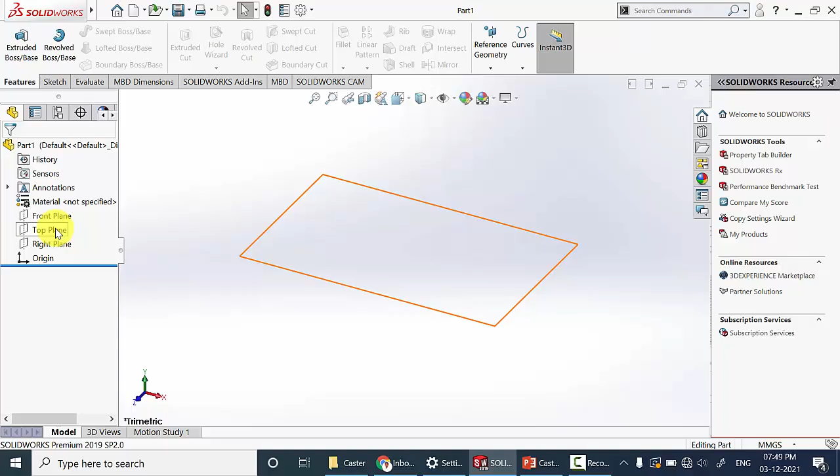Go to SOLIDWORKS, click new and create a new part. First I am going to draw the front view: select front plane, click sketch, and draw the outline of its front view.

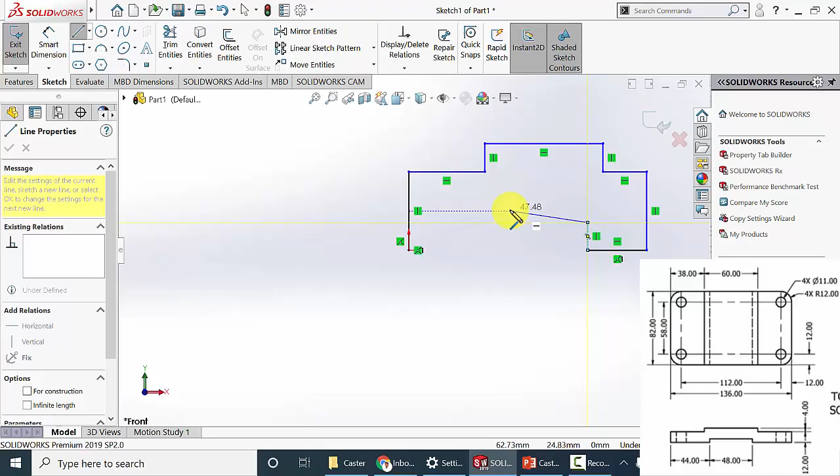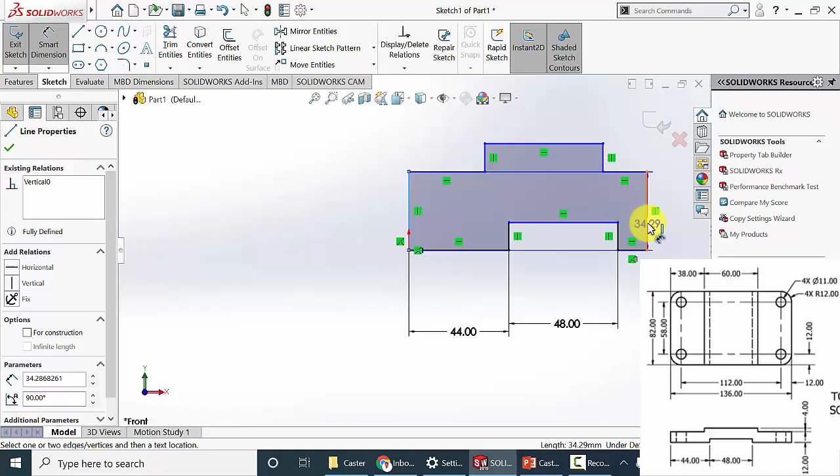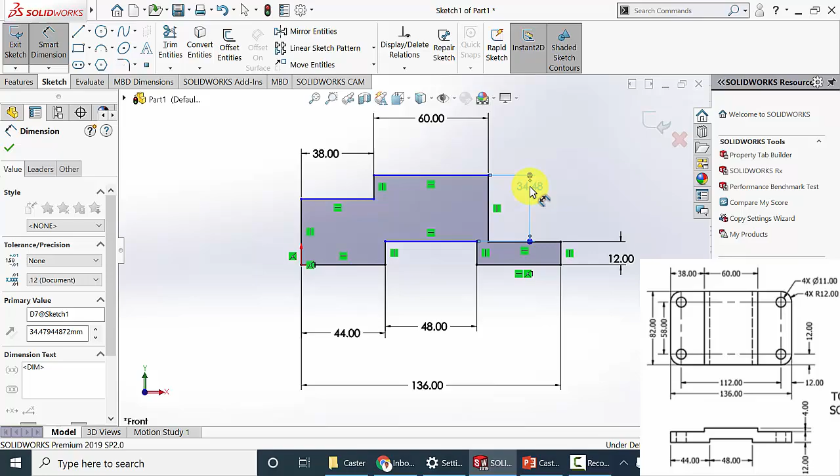The length of this region is 44 mm, then here it is 48. The overall length is 136. Then this length is 38 mm, then here the length is 60 mm. The height of this region is 12 mm, so here also it is 12. Then the height between these two surfaces is 4 mm.

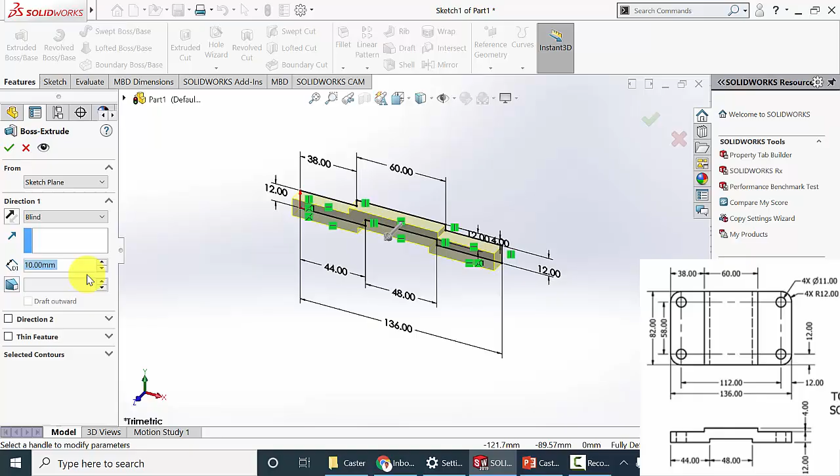Click OK. Go to Features, click Extruded Boss. The extrude distance is 82 mm.

Now to draw the holes, click the top plane, click Sketch and draw a circle here. The circle diameter is given as 12 mm, and the circle is located at a distance of 12 mm from each side of the plate.

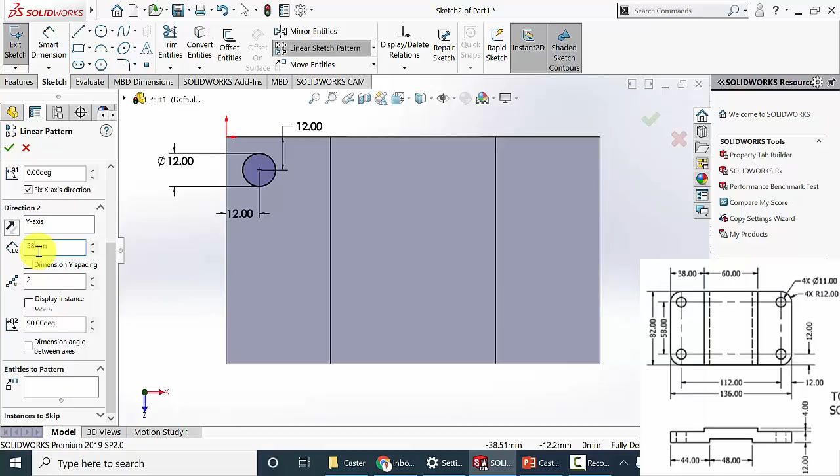Now I am going to create the linear pattern. Go to Linear Sketch Pattern. In the X direction, I am going to pattern it with a distance of 112 mm, and in the Y direction the number of patterns is 2 and the distance between the holes is 58 mm. Select the entities to pattern. The Y direction is upward, so change the direction, then click OK.

Now go to Features, click Extruded Cut, then click OK. Then I am going to create the fillet, click Fillet, and the fillet radius is given as 12 mm. Select the 4 corners.

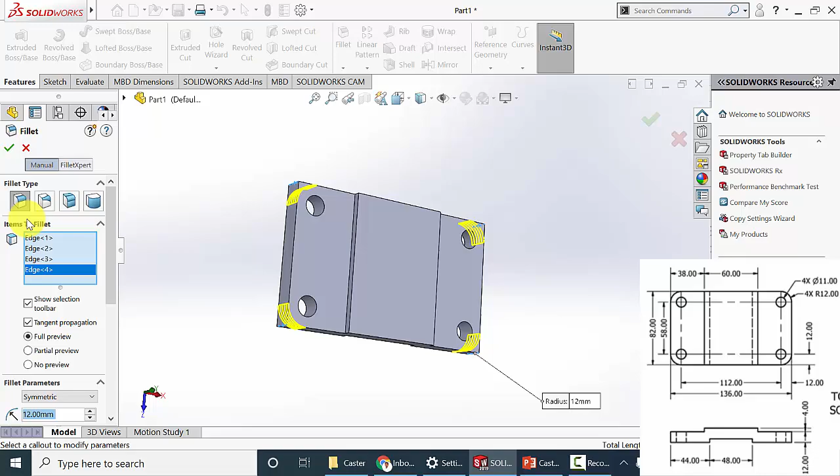Now you can save this. Next I am going to draw the wheel. Create a new part.

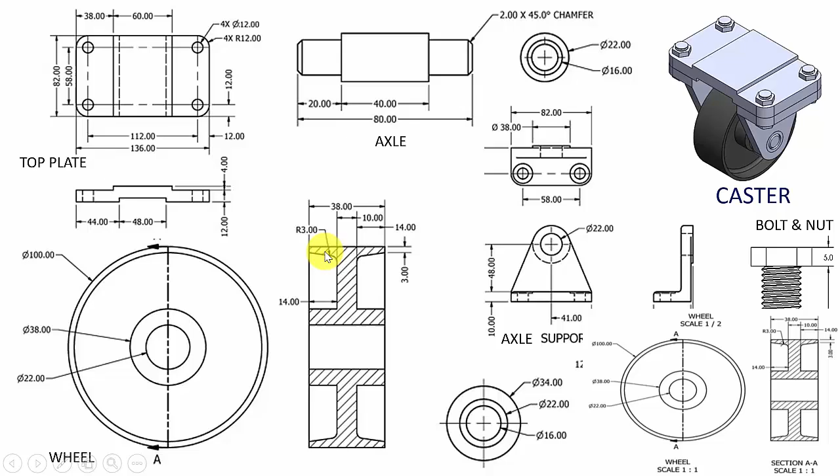In the wheel, I am going to draw this region, then revolve it. Select right plane, click Sketch and draw the outline of the cross section.

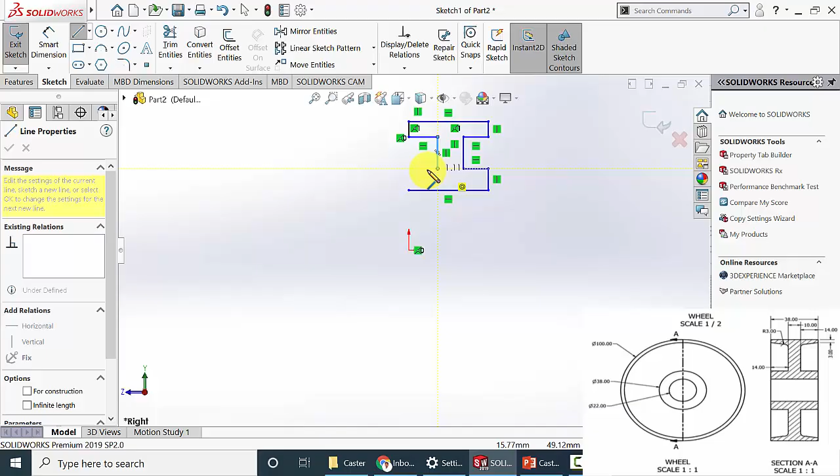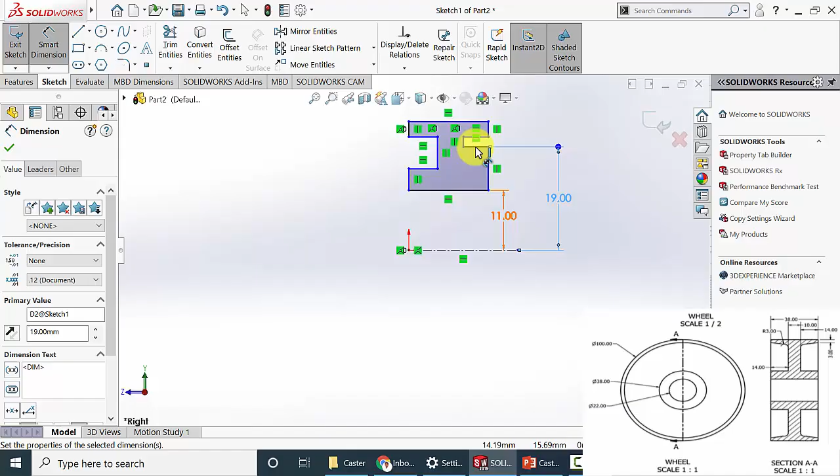Draw a center line at the center for reference. Now mark all the dimensions. The diameter of the internal hole is given as 22, so the radius is 11 mm. Then the diameter of the hub is given as 38, so the radius is 38 by 2. And the outer radius is 50 mm.

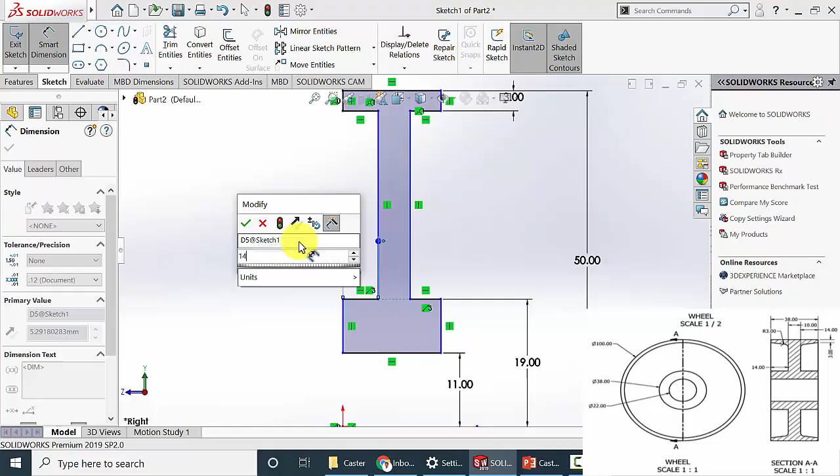Now these two lines are collinear, so click Ctrl, select the two lines and click collinear. Then the length of this line is 3 mm. Then this gap is 14 mm. The overall length is 38 mm. Then here also this line length is 14 mm.

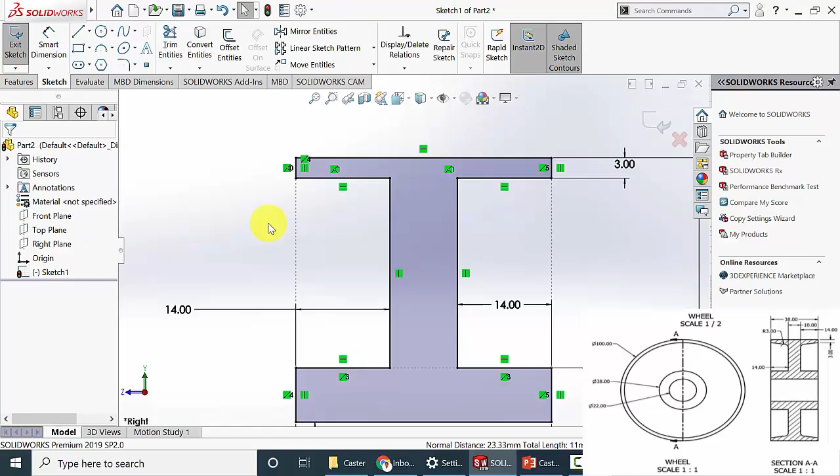So these two lines are collinear; select these two lines and click collinear. Similarly, these two lines should be collinear, so select them and click collinear. Now all the lines are constrained. The fillet radius is given, so select fillet and the radius is 3 mm. Select these two edges, then click OK.

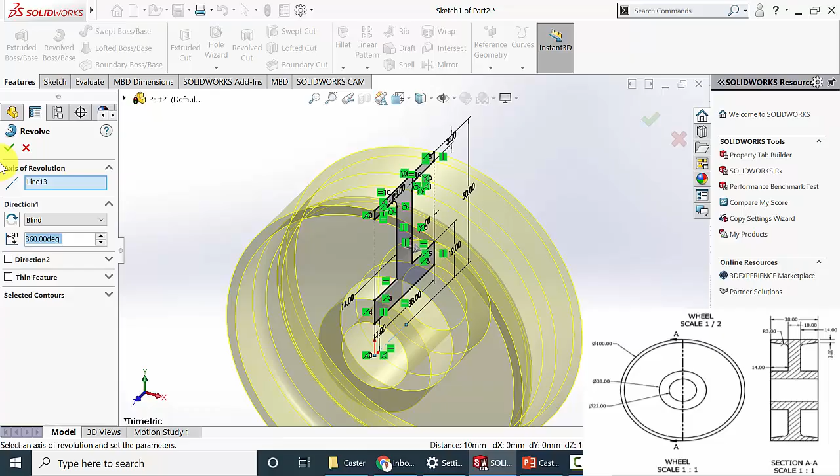Now go to features, select Revolve Boss and click OK. Now we can save the part.

Next I am going to draw the axle support. Create a new part. First I am going to draw this region, this rectangle-like region, then construct the top structure.

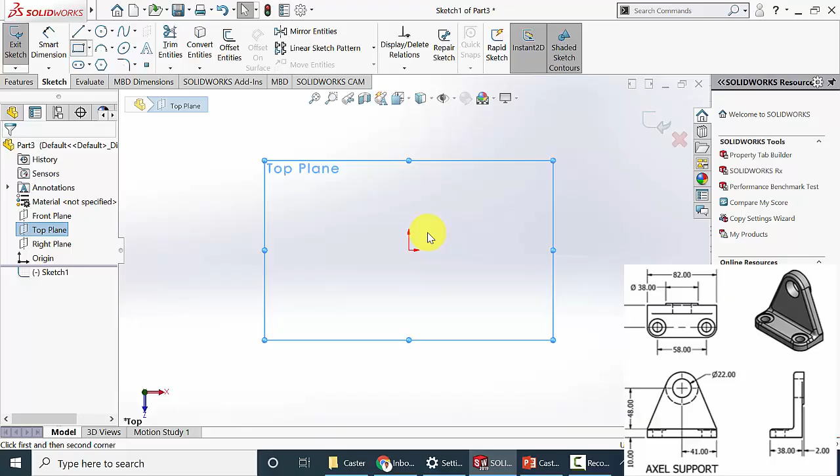Select top plane, click sketch, draw a rectangle, and the rectangle length is 82 mm and the width of the rectangle is 38 mm.

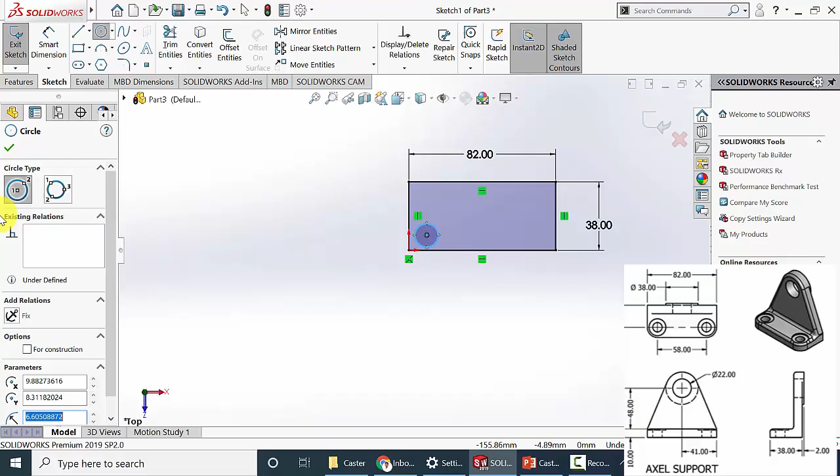Then draw two holes here. The diameter of the hole is 12 mm and the hole is located at a distance of 12 mm from each side of the plate.

Next I am going to pattern this hole. Go to linear sketch pattern and pattern it in the x direction. The number of patterns is 2 and the distance between the two holes is given as 58 mm in the drawing. Then select the entities to pattern.

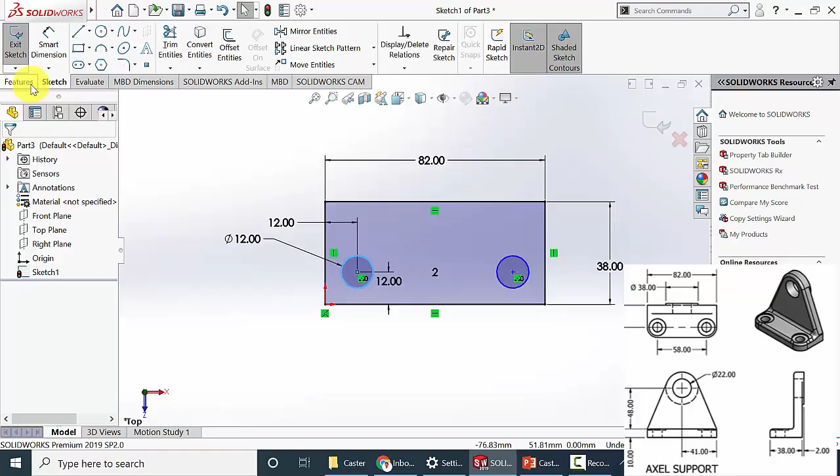Click OK. Now go to features, click extruded boss and the height is 10 mm. Click OK. Now I am going to create the fillet. Select fillet, select these two regions, and the fillet radius is 12 mm. Then click OK.

Now I am going to draw the top section. Select this region, click sketch.

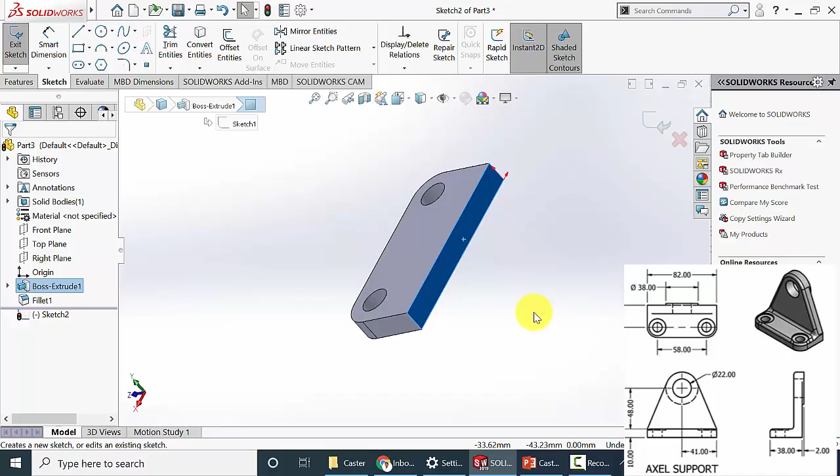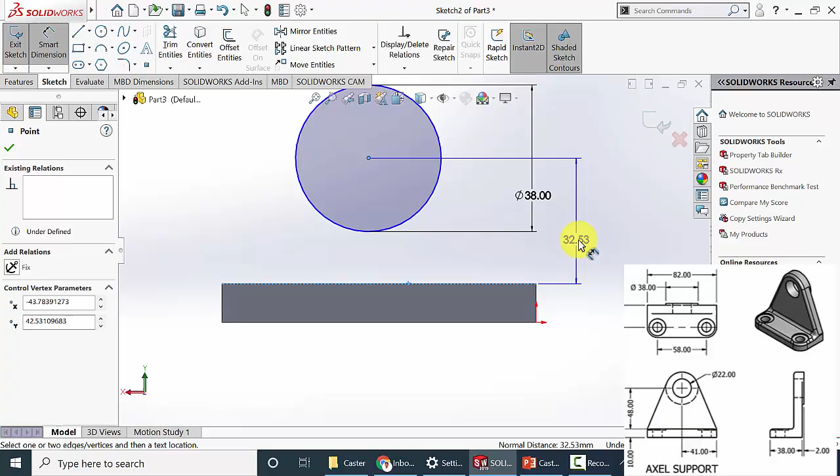First draw a circle at the top. The diameter is given as 38 mm and the circle is located at a height of 48 mm from the bottom, and it is located at the center.

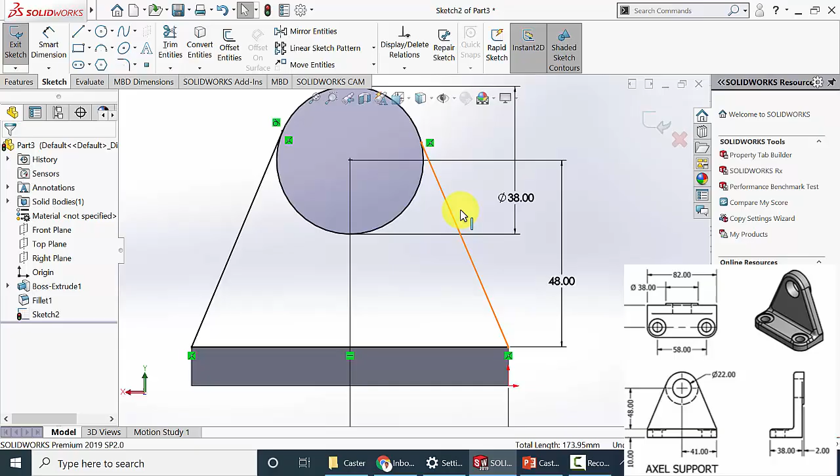Draw a line from the rectangle that connects the circle. Now select this line, click Ctrl and select the circle and click tangent. Similarly select this line, select the circle and click tangent. Now go to trim entities and trim this unwanted line.

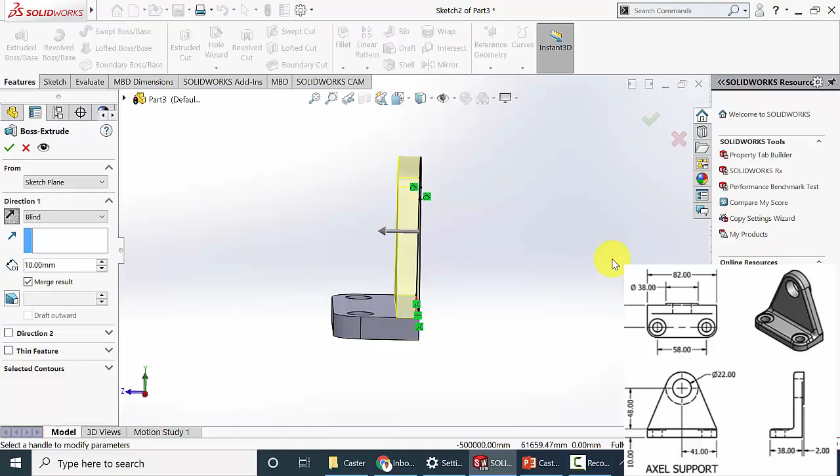Click OK. Go to feature, click extruded boss. I am going to extrude in the opposite direction. The width of this section is 10 mm because the bush length is given as 12 mm, and here we have an extruded length of 2 mm, so the remaining region is 10 mm.

Now select this section, click sketch, draw a circle and click Control, click the circle, click the outer circle, and these two circles are co-radial and concentric. Then click OK. Go to Features, click Extruded Boss and the length is 2 mm.

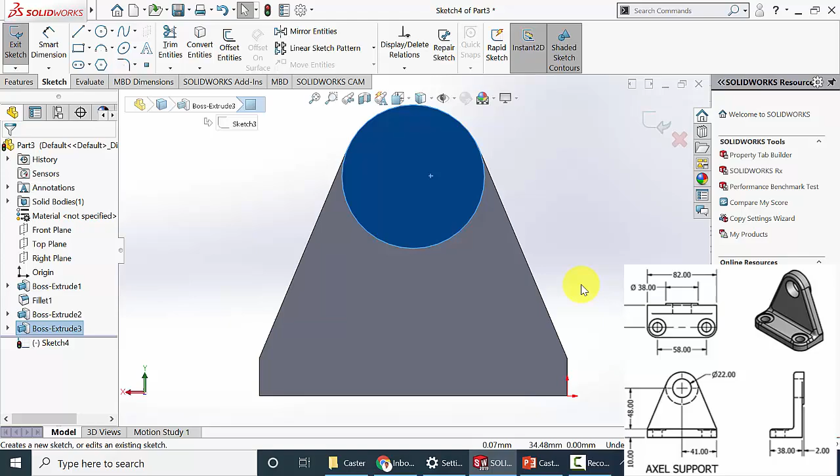Then again select this section, click Sketch and draw a circle of diameter 22 mm. So now these two circles are concentric. Click Control, select these two circles and click concentric.

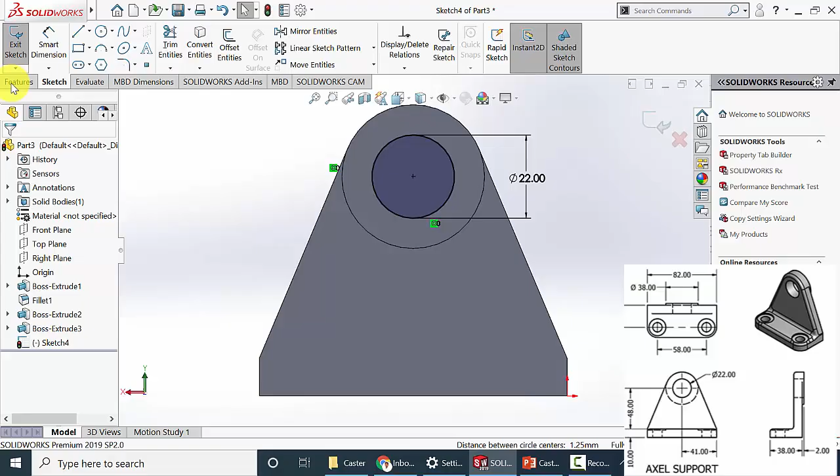Now go to Features, click Extruded Cut. Change it to up to surface and select this surface. Then click OK. Now we can save this.

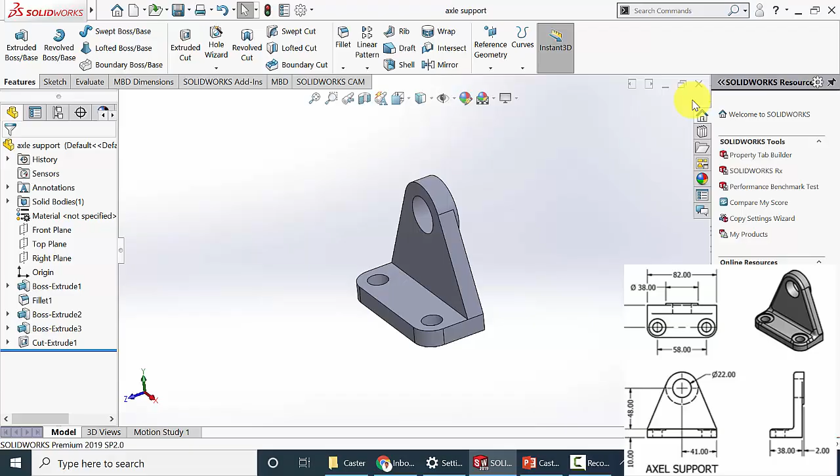Next I am going to draw the axle. Click New, create a new part. In the axle I am going to draw the front view and revolve it. Select front view, click Sketch. First I am going to draw the top section alone.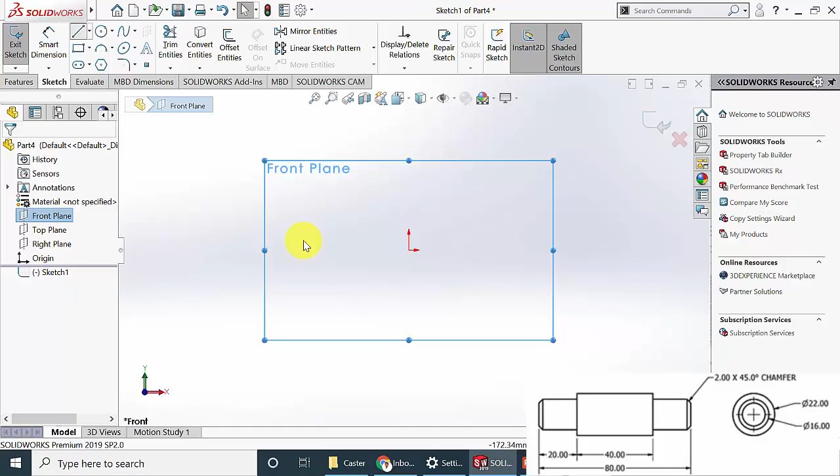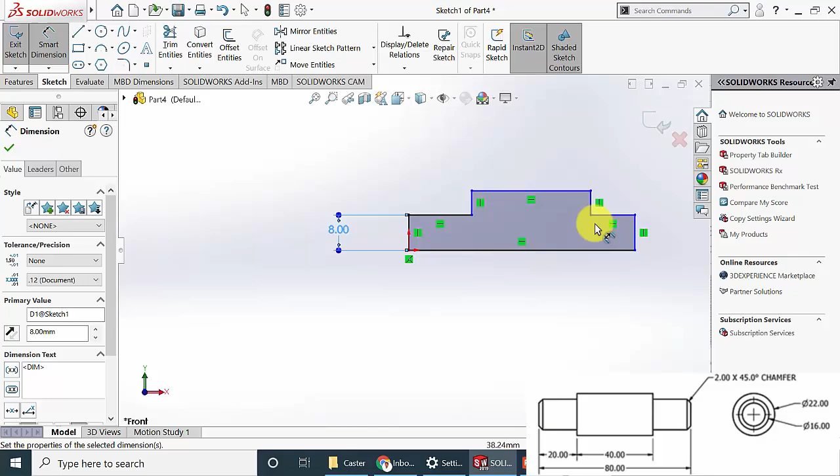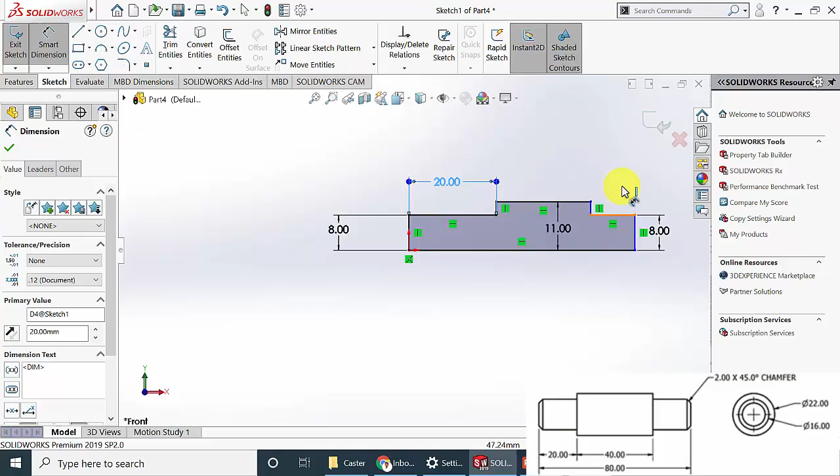The smaller diameter is given as 16, so the radius is 16 by 2. Here also it is 16 by 2. And the diameter of the largest section is given as 22, so the radius is 11. The length of this region is 20. Here also it is 20. Then the remaining region length is 40 mm.

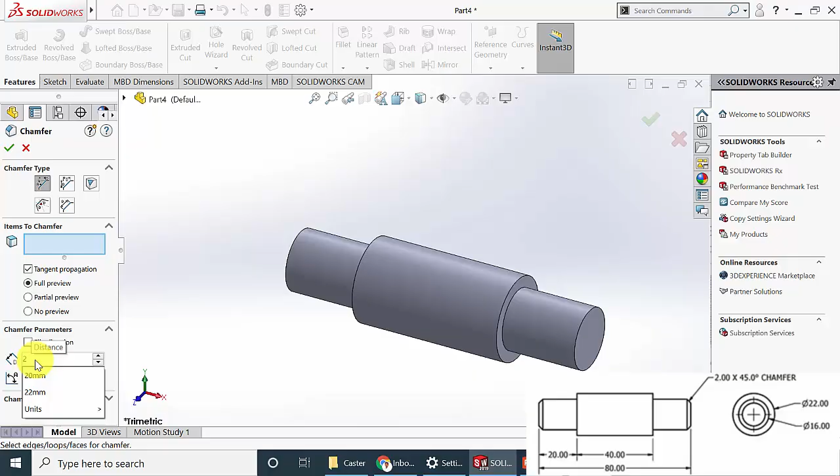Click OK. Go to Features. Click Revolve Boss and select the center axis. Then click OK. Next I am going to create the chamfer. Go to chamfer, the angle is 45 degrees and the chamfer distance is 2 mm. Then select these two edges. Then click OK.

Now we can save this. Next I am going to draw the bolt. The bolt is an M12 bolt of pitch 1.5 mm. So create a new part.

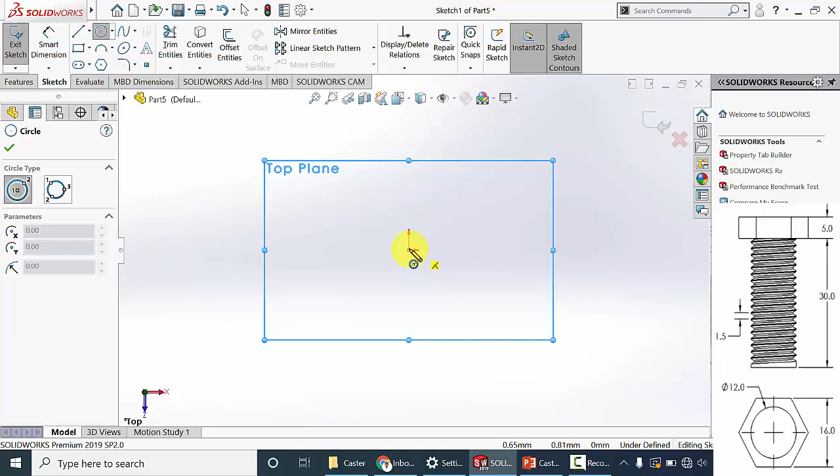Select the top plane. Draw a circle of diameter 12 mm. Click Extrude, extrude this to a height of 30 mm. That is the length of the bolt.

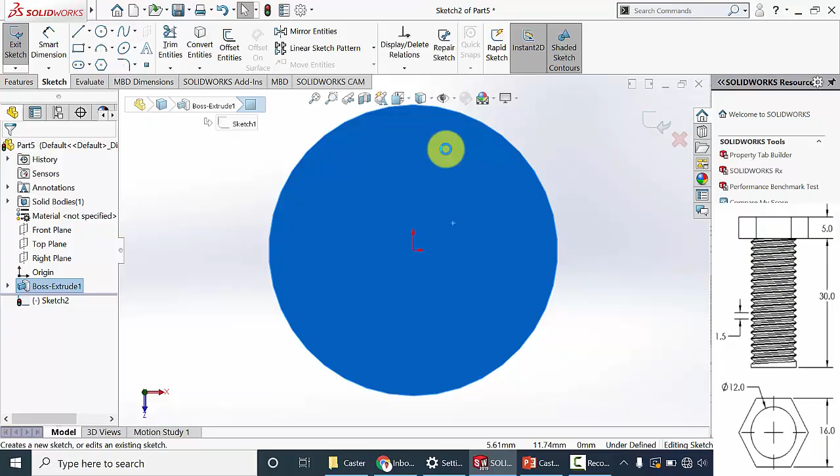Then select this section, click Sketch. Select Polygon and draw a hexagon. The length of the hexagon is given as 16 mm. Click OK, go to Features and extrude this to a height of 5 mm.

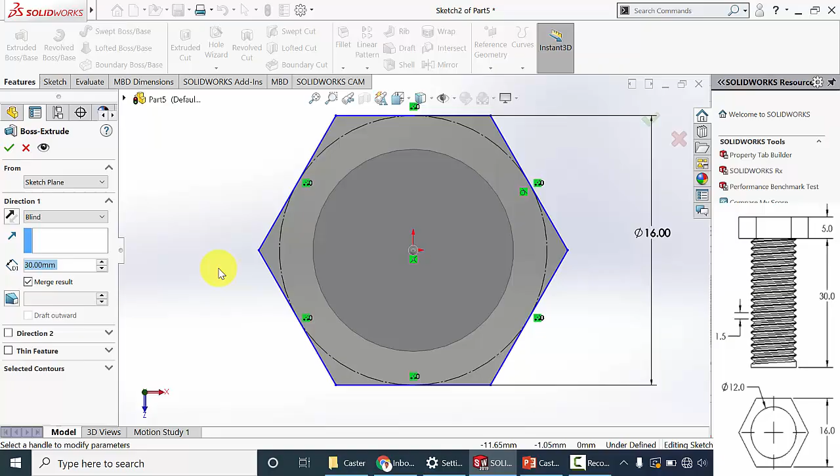Next I am going to create the thread. Go to Hole Wizard, select Thread. First select the edge point from where we want to start the thread. Then select the initial face. Then click the end condition and select the end plane.

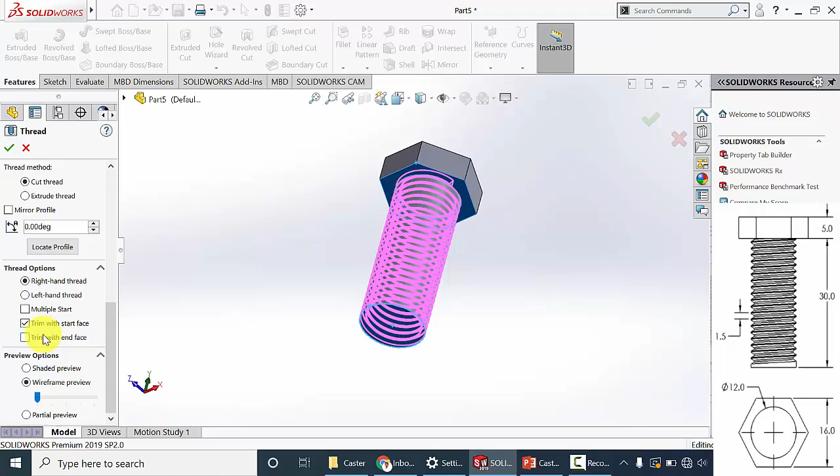So now the thread size is defined as M12 into 1.5. Then select Trim with start face and trim with the end face. Click OK. Now save this.

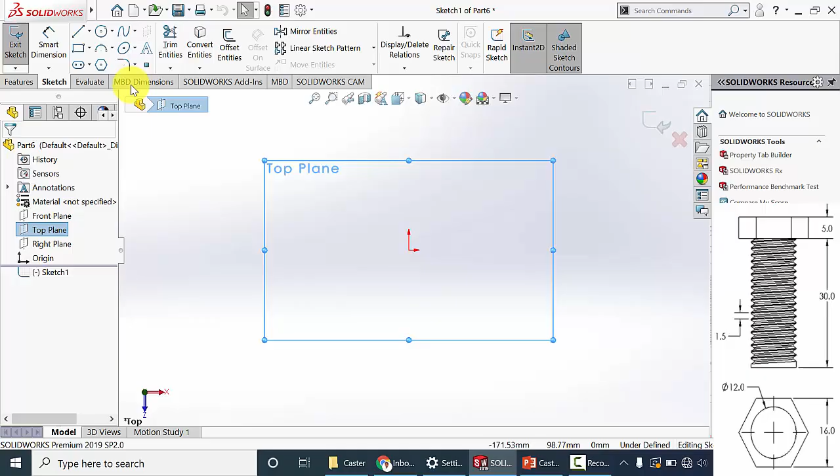Next I am going to draw the nut. Create a new part. Select the top plane. Draw a polygon. The width of the polygon is given as 16 mm.

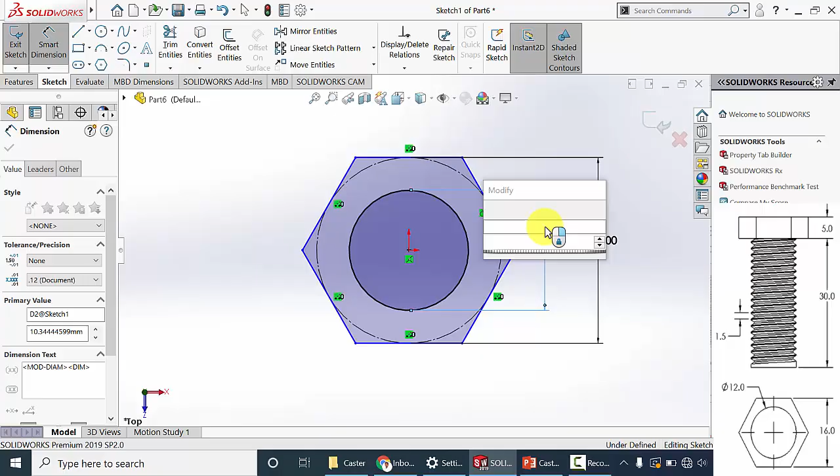And draw a central hole. The hole diameter is 12 mm. Go to Features, click Extrude Boss and extrude this to a height of 5 mm.

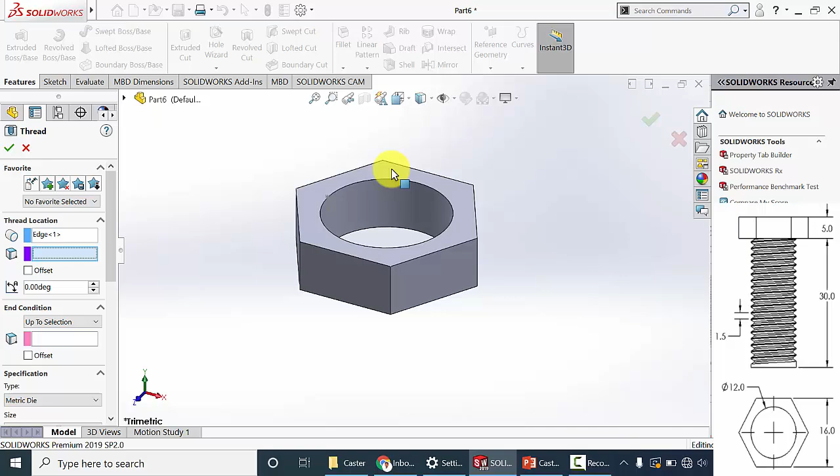Next I am going to create an internal thread. Go to Hole Wizard, select Thread, click the Start region, then Starting Face, then the Ending Face. The thread size is already defined, it is M12 into 1.5. So here you have to click Extrude Thread, trim with the start face and trim with the end face.

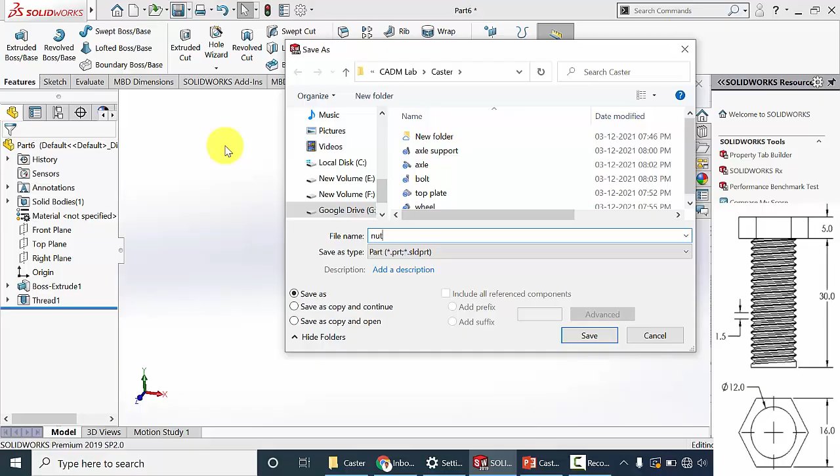Now save this. Next I am going to create the bush. Select a new part.

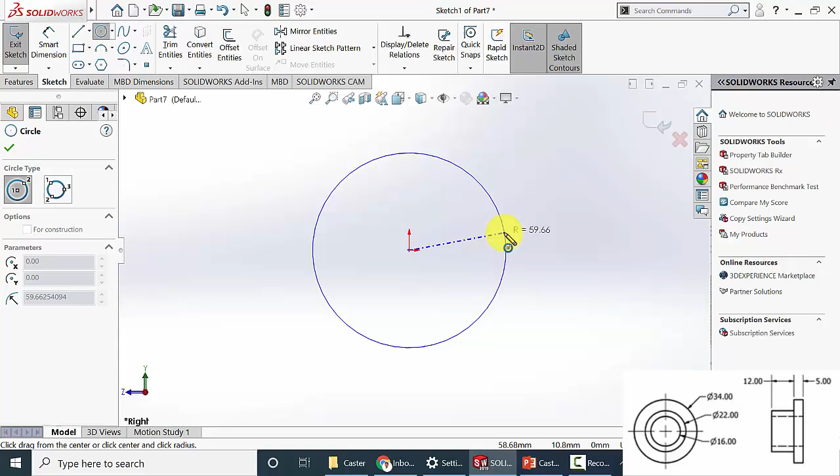Then select the sketch and draw another circle of diameter 22 mm, and extrude this to a distance of 12 mm.

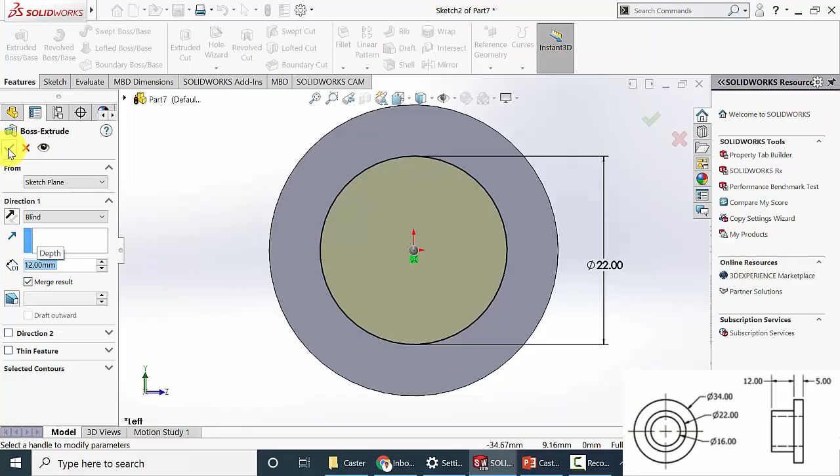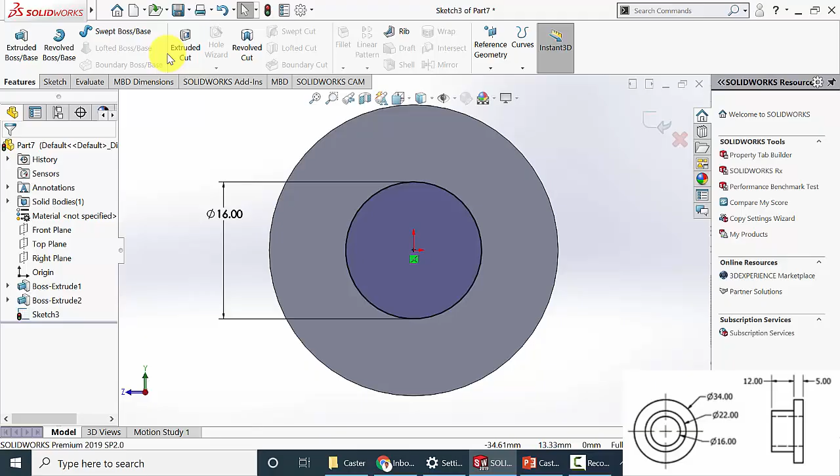Then again select this section, click Sketch, draw an internal hole with a diameter of 16 mm. Go to Feature, click Extruded Cut, and change the blind to up to surface, then select this surface.

Now we can save this. Now we have created all the parts. Now I am going to assemble it. Click New and create a new assembly.

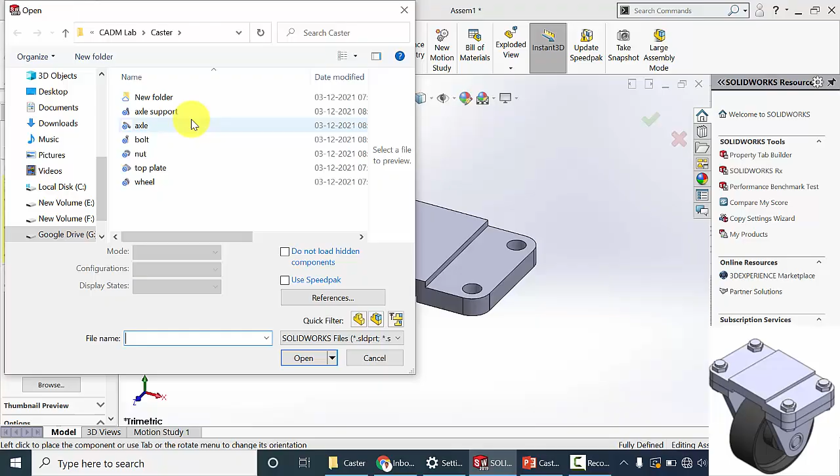First I am going to import the top plate. Select the top plate, click OK. Then select Insert Components. Next I am going to import the axle support, so we can change the orientation.

Then click Control, click and drag this axle support to create another one. Now to rotate this, right click on that and select Move with Triad and we can rotate this.

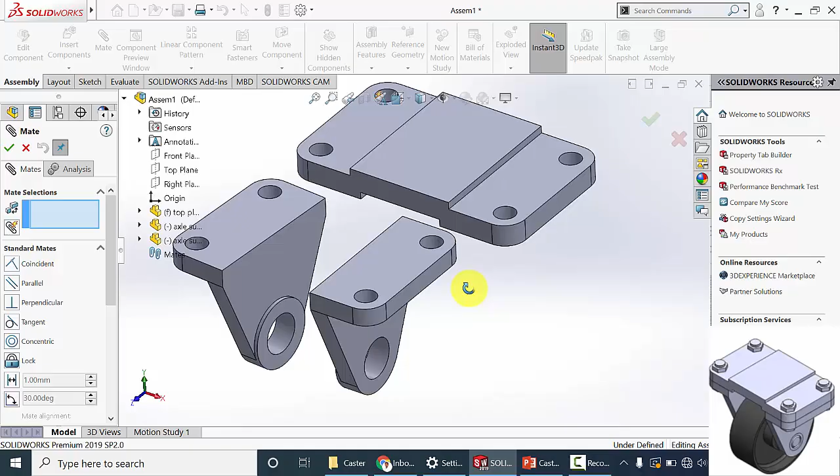Now go to Mate. Select these two regions; these two regions are coincident. Then select these two holes, then select Concentric. Then select these two regions and these are coincident.

Similarly select the top face of the axle support and the bottom face of the top plate, then click Coincident. Then select these two holes, and similarly select these two edges.

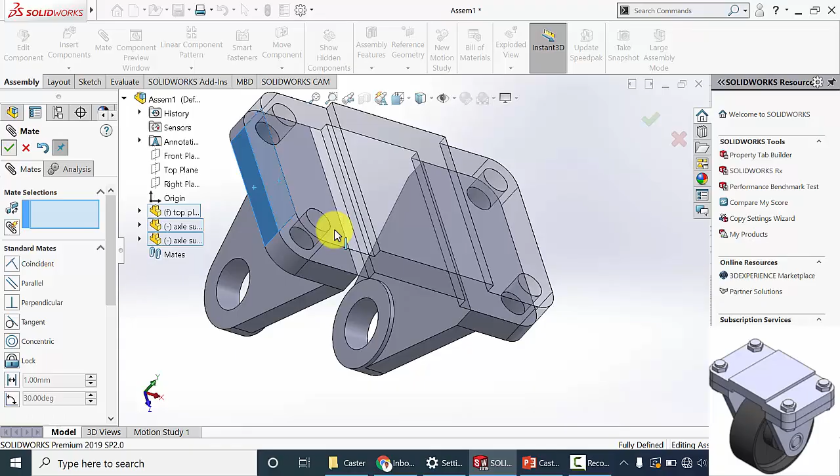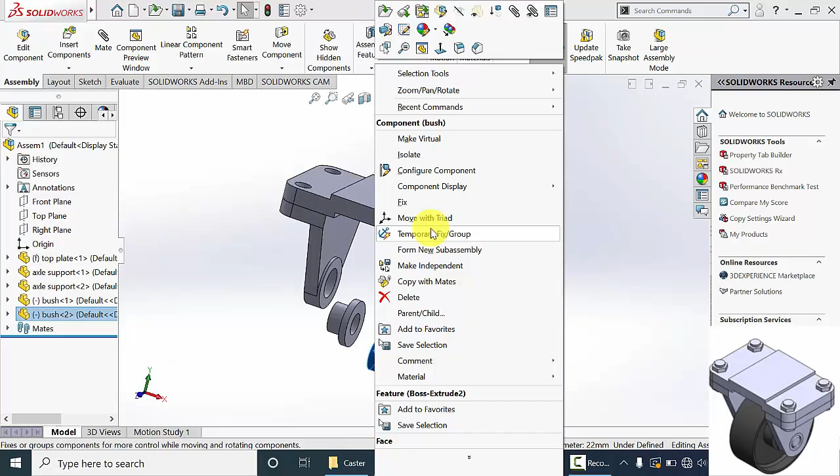Next I am going to import the bush. Go to Insert Component and select the bush. Click Control, select and drag the bush. To rotate this direction, right click on that and select Move with Triad and we can rotate this.

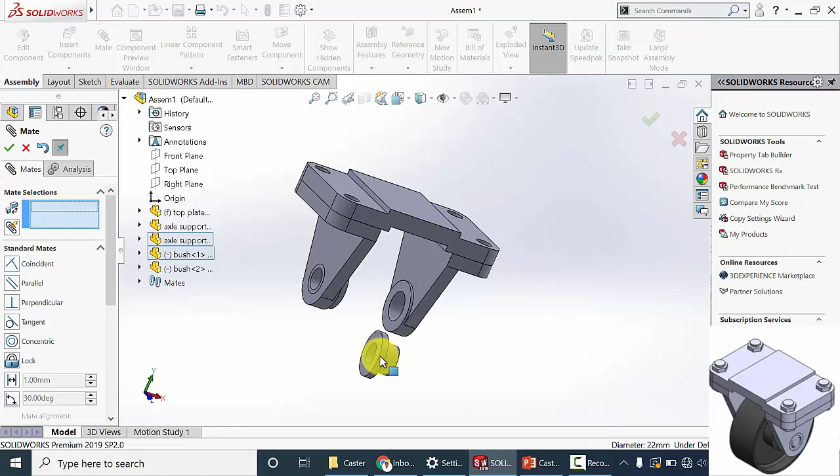Now select Mate, select these two regions, then the two holes. Similarly select these two regions, then select the two holes.

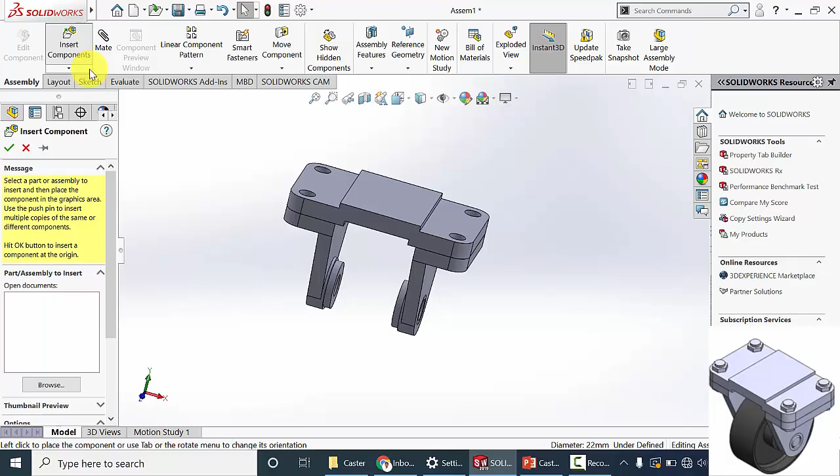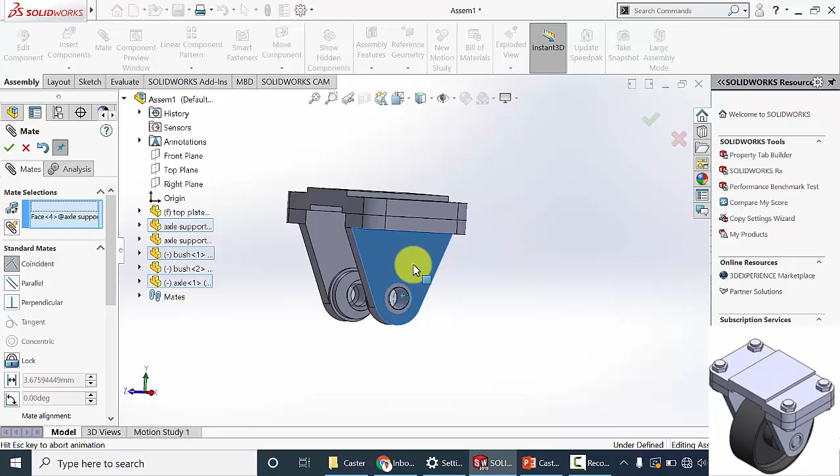Next I am going to insert the axle. Select the axle, go to mate, select these two holes, click OK. Similarly select these two regions, then click OK.

Next I am going to insert the wheel. Select the wheel, so we can change the orientation. Go to mate, select these two regions. If you want, we can lock the rotation, then click OK.

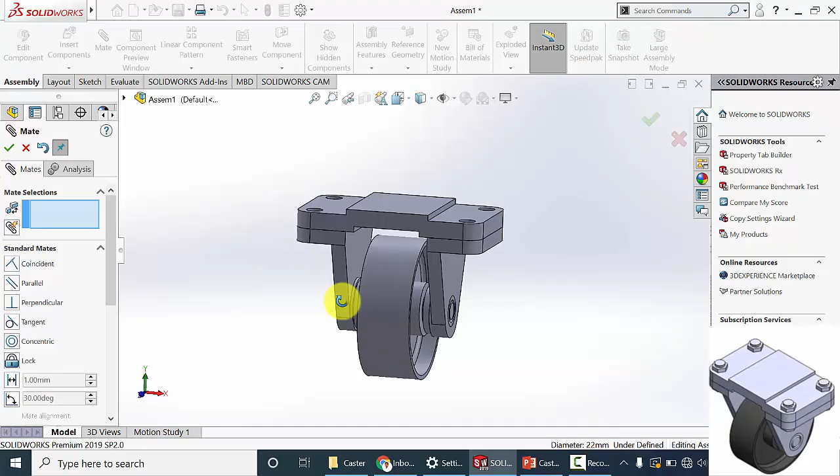The length of this axle is 40 mm and the wheel length is 38 mm, so 1 mm clearance is left at each end. So select these regions and provide a distance of 1 mm. You can verify that in the opposite side, then click OK.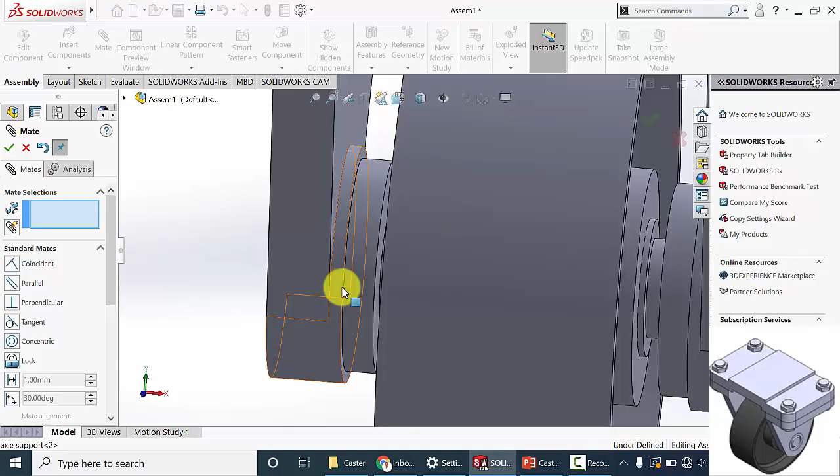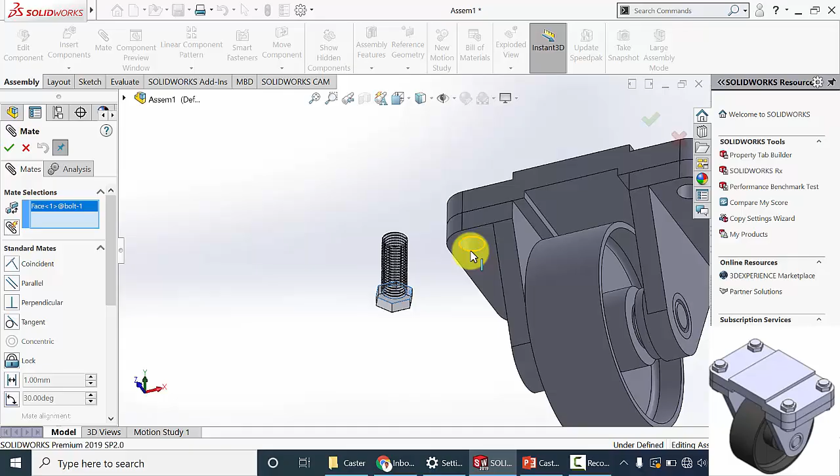Next I am going to insert the bolt. Change the orientation, so select mate. Select these two regions, similarly select the hole and the top circle of the bolt, then click OK.

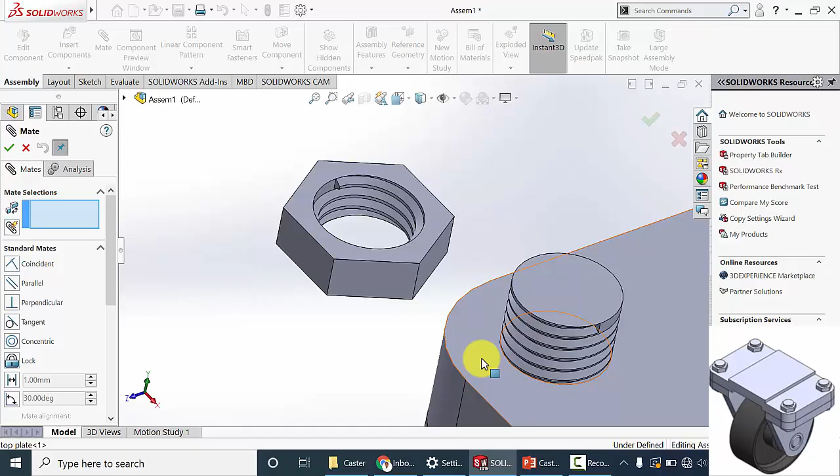Next insert the nut. Select mate. Select the top plane of the top plate and the bottom of the nut, then click OK.

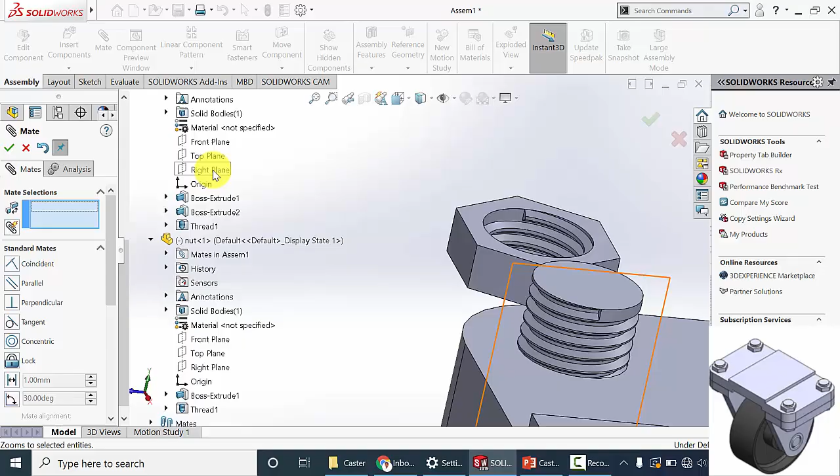Then to assemble the nut with the bolt, you can click the arrow and select the bolt and the nut. Now select the front plane of the bolt and front plane of the nut, click OK. Then the right plane of the bolt and the right plane of the nut, click OK. So now I have assembled a single bolt and nut.

Now I am going to pattern this. Go to linear component pattern. So the direction 1 is selected. Similarly select the direction 2.

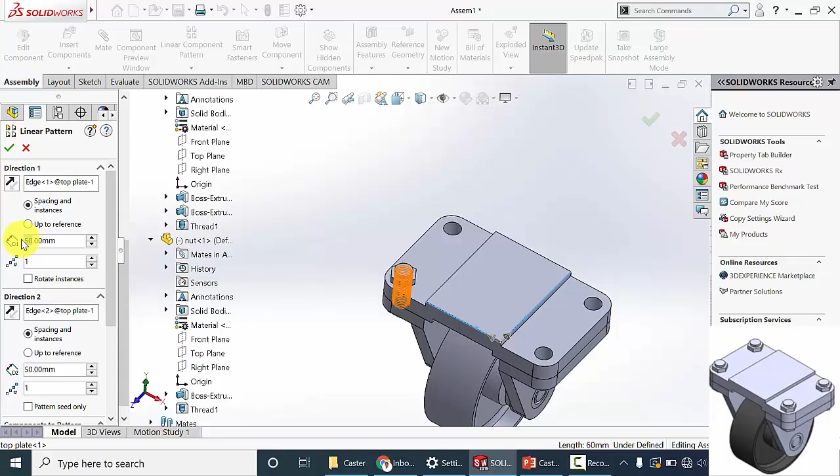In direction 1 the distance between the holes, as given in the drawing of the top plate, is 112, and the number of entities is 2. In the y direction the distance between the two holes is 52 mm and the number of patterns is 2.

Now components to pattern: select the bolt and the nut. In the x direction it is in the opposite direction, so change the direction, then click OK.

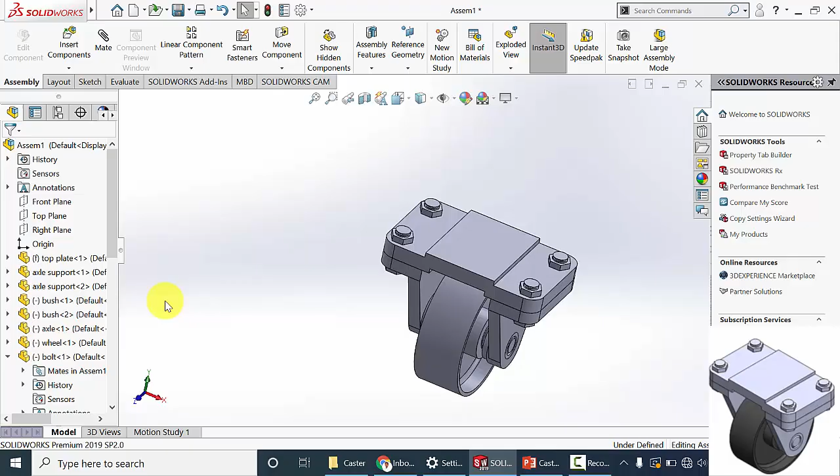Sorry, actually the distance between the two holes is 58 mm. So to change this, right click on that and click edit feature, and change the distance to 58 mm, then click OK.

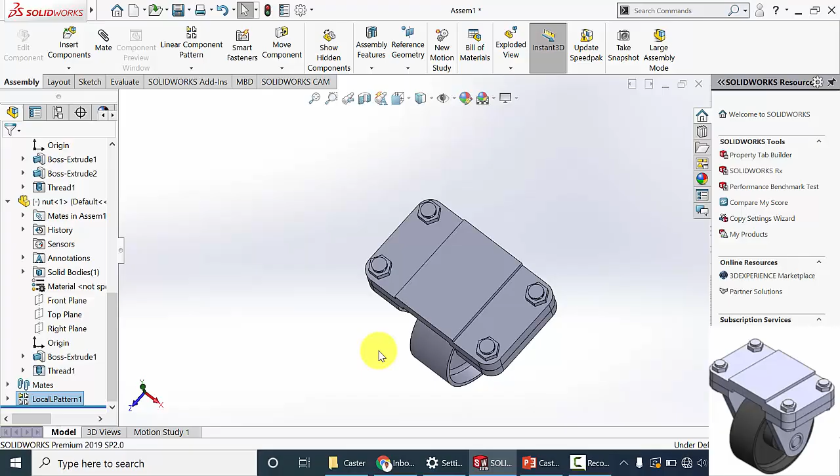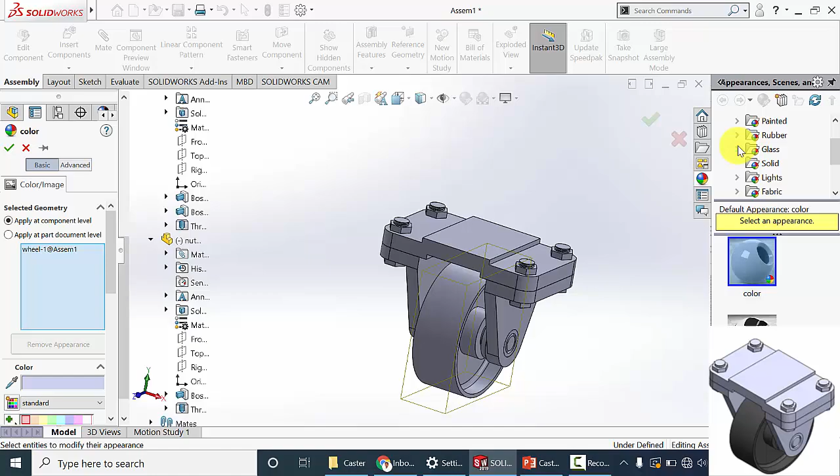Now that's all. If you want to change the color, for example of the wheel, right click on that, click appearances, and select the wheel, and in that you can change the color. For example I am going to select the rubber and the glossy rubber. You can double click on that, then click OK. Similarly if you want, you can change the color of all the parts individually. That's all. Thank you.